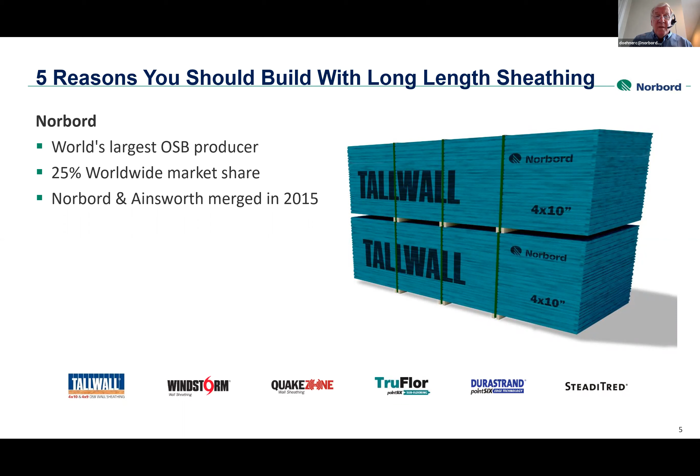And we became the largest producer in 2015 when we merged with a West Coast company called Ainsworth. TallWall that you see there in the slide is one of our brands that you'll probably have seen in your market, and it was actually the first long length wall sheathing product. Long length sheathing is a panel that covers both the floor and the wall framing with a single piece of sheathing. Long length panels make the home look clean and well constructed.

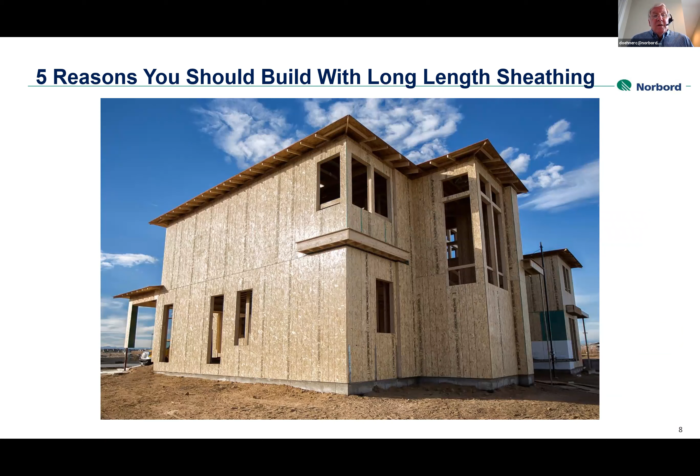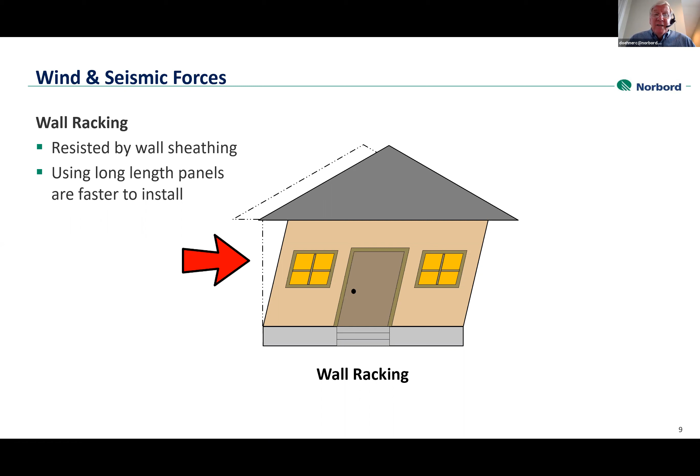The building codes require walls to resist racking. Wood structural panels are typically used for this purpose. And when we refer to wood structural panels, what we're referring to basically is OSB or plywood. They all fit in that category and serve the same purpose.

The first one is saving a half day of framing time per house. And basically how that comes about is from our customers. You'll see as we go through this, there are some labor and time saving things that you may currently be doing that will go away if you use the longer length sheathing. And of course that time saving adds up quite quickly when you multiply it by the number of houses that you do.

Sheathing walls with 4x8 panels typically requires installing lumber blocks between the studs, trimming panels, and nailing panel joints into the blocking. For as we all know, even an 8-foot ceiling height slab home is taller than 8 foot on the outside. So basically what we're saying there is, most people don't build 8-foot single stories anymore, but if you had an 8-foot single story, an 8-foot piece of sheathing really doesn't cover your entire wall because your wall is taller than that on the outside.

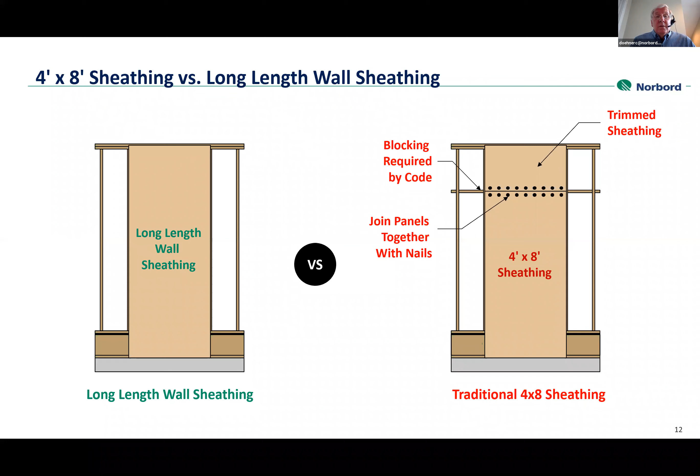When you have blocking, it requires a significant amount of additional framing lumber. Again, a framing crew spends about a half day just installing the needless blocking. This is costly and unnecessary work, especially because we don't have enough framers currently to go around. We certainly don't want them spending valuable time doing unnecessary work.

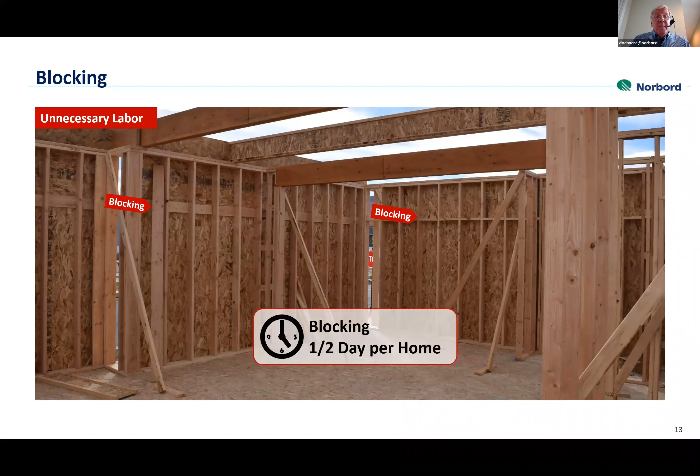Framers can install sheeting in different ways. You'll probably recognize one of the methods we're going to show you here. Some framers use 2 pieces of sheeting for each story, one full 8-foot length joined with a trim length. If you look at the photo, you can see the 8-foot on the top story and the 8-foot on the bottom story, and then a piece that had to be trimmed to do what we typically call a belly band around the house.

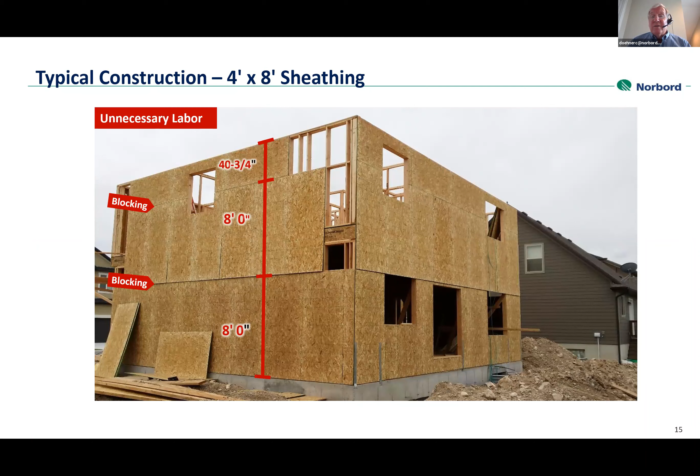With 4x8 sheeting, there's also a row of blocking that goes around the house at each story. So where you see that joint, it's not lining up into the floor band, it's lining up plus or minus of it. So there's blocking that has to be installed there. Other framers use 3 pieces of sheeting for the entire house. 2 pieces are a full 8-foot length and the third is a trim piece. However, this method still results in a row of blocking at each story that goes around the entire house.

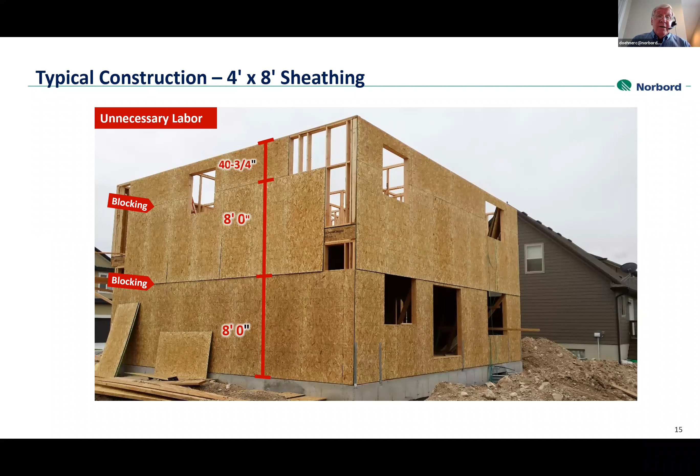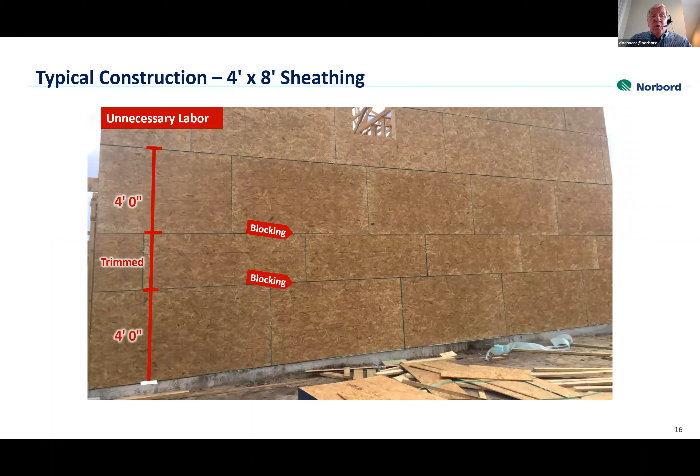In this example, you'll notice the sheeting is installed horizontally. Since the wall sheeting is greater than 8 foot, there needs to be 3 horizontal panels. Therefore, this method of sheeting requires 2 rows of blocking instead of 1 that you saw when the panels were oriented vertically.

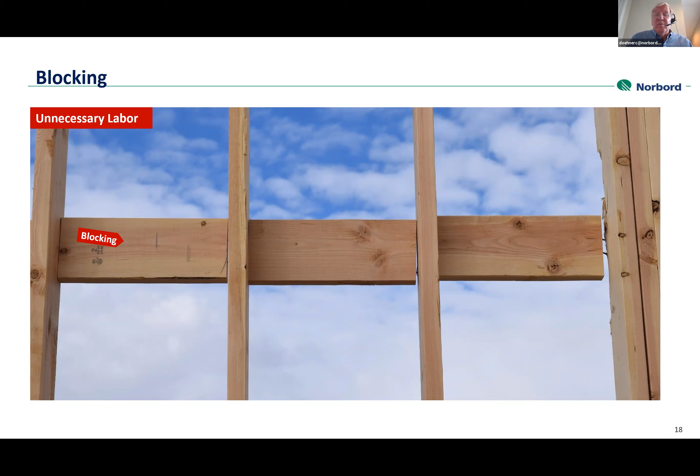These next slides can help you understand how much work blocking is for the framer. Each block has to be cut to 14.5 inches, nailed between the studs, and then the 4x8 sheeting is fastened into the 2x4 or 2x6 lumber blocks. In this photo, you can see the framer was able to construct his walls without having to install blocking because he had full-length sheets. So obviously that's going to speed him up.

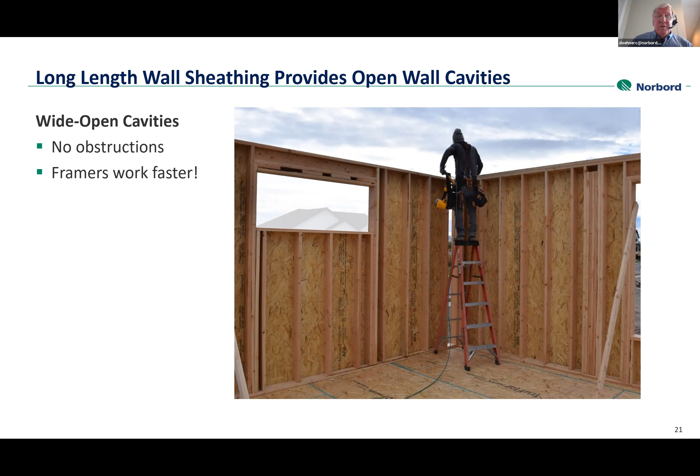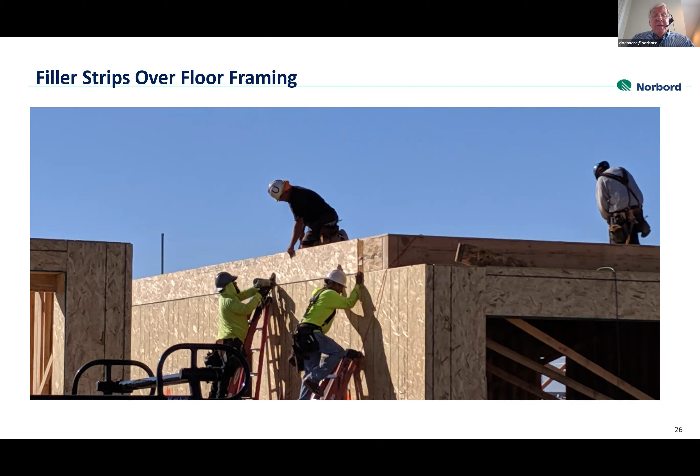Oops, sorry, clicked once too quickly there.

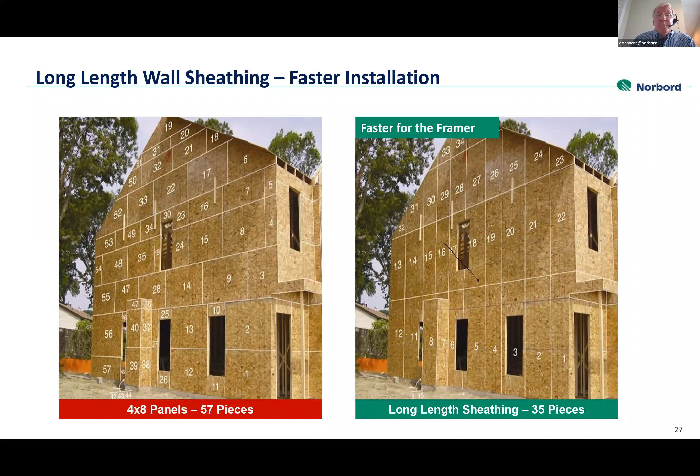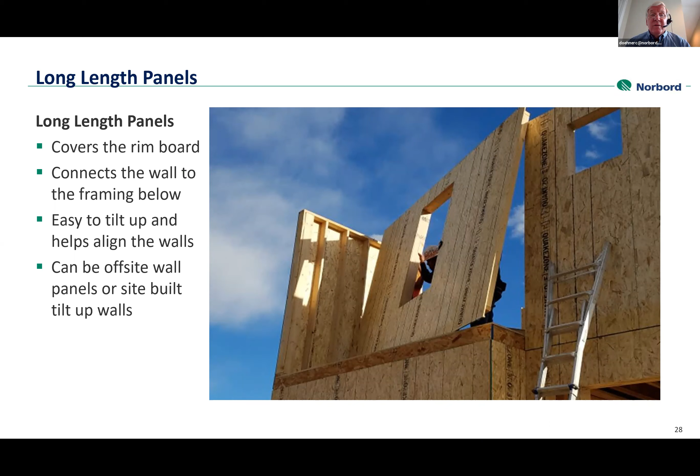This shows one way you can do that. One of the added benefits is it actually helps the framer straighten that wall, because now he's got that lip there that's going to hold it up against the floor system and allow his wall to be straighter without as much adjustment.

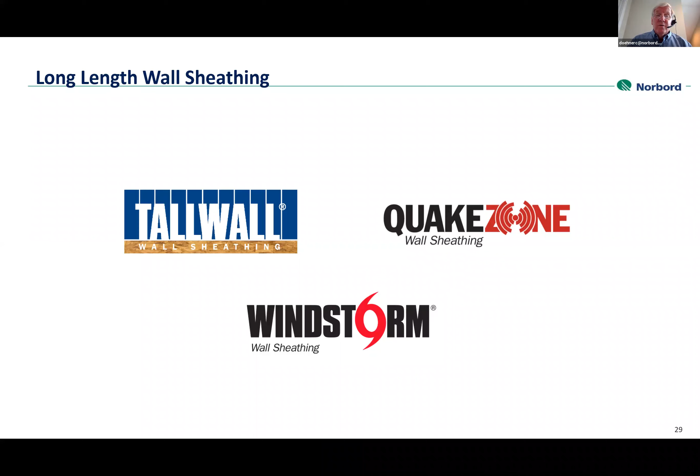NORBORD makes 3 different brands of longer length wall sheeting, 2 of which you would see in your region. Tall Wall, which most of you hopefully have seen, there's a fair amount of it used in your marketplace, and that's the original longer length panel. It's been out for over 10 years now. We also make Windstorm, which was originally designed for the high wind areas, and then Quake Zone. Quake Zone is a product that you won't see in the Maryland marketplace. It's a more Western product designed for the earthquake-prone areas of the West Coast. As I said, Tall Wall is the original length panel. It is available in 9 and 10 foot lengths.

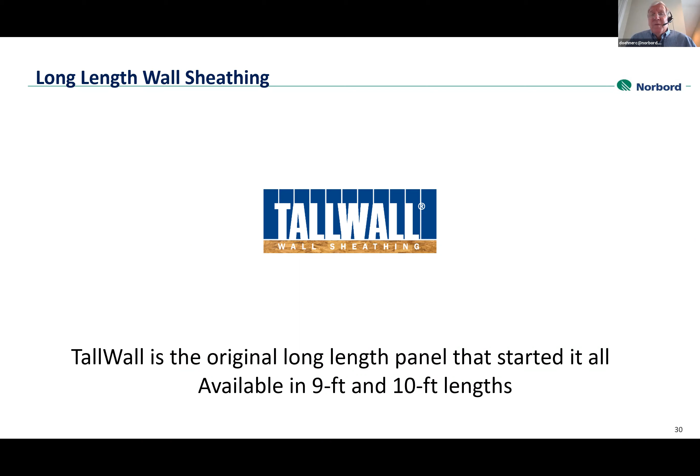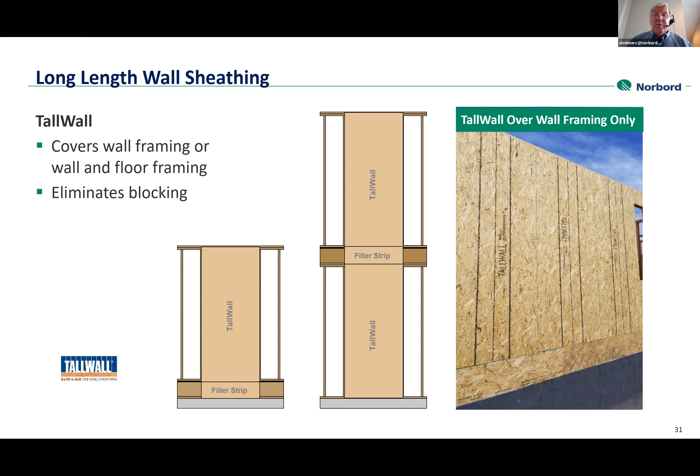And here's what we typically see in your market, the way it's used. Again, you can see the Tall Wall sheet is covering the wall section, but then there's a filler strip typically when there's a floor system, whether that be under the first floor or between the first and second floor.

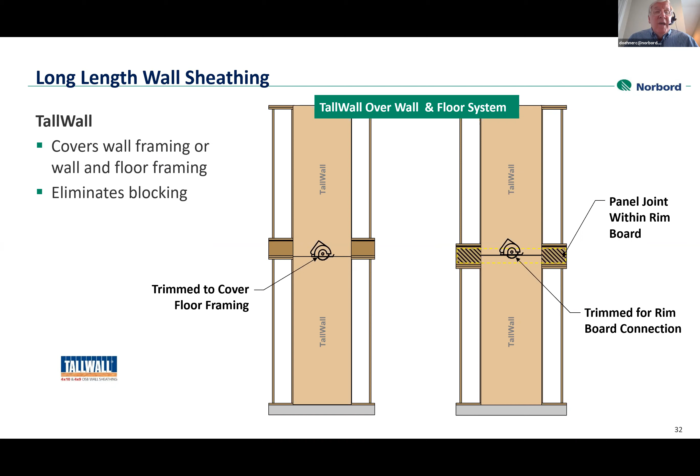Our TallWall brand is available in the 9 and 10 foot lengths, like I indicated. Depending on how you use it, sometimes you'll see the 10 foot sheets, especially where it will take you up into the floor system if you had a 9 foot wall on a slab like you're seeing here. And there are opportunities to use Tall Wall, both 9 and 10 foot, and do the house in 2 pieces if you have a 2-story home.

So I don't confuse you, and I already really mentioned that, QuakeZone, as I said, is available only on the West Coast.

Windstorm is the second generation of long length wall sheathing. It was initially designed for the high wind areas such as you have in Maryland in the coastal areas when you get to Ocean City and other areas on the eastern shore there. This second generation long length panel is available in longer and more specific lengths. It's available up to 145 and an eighth in length, so 12 foot, inch and an eighth in length.

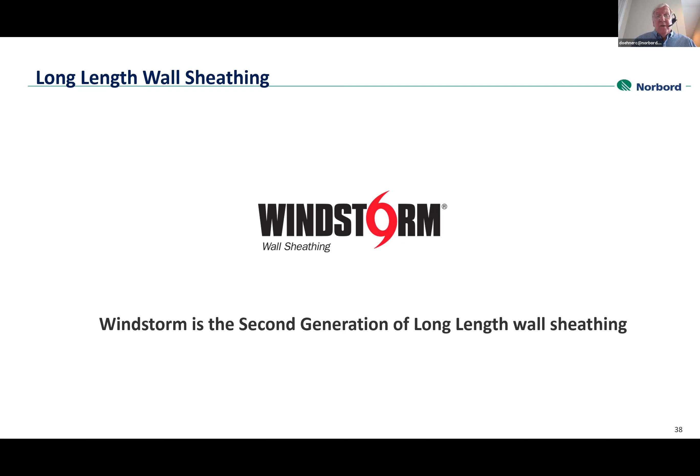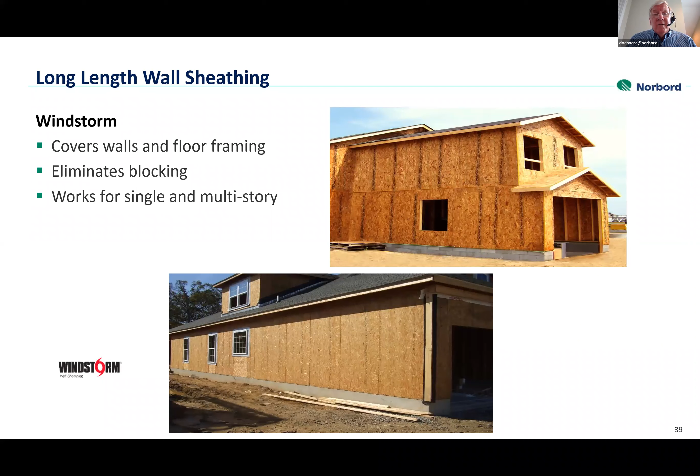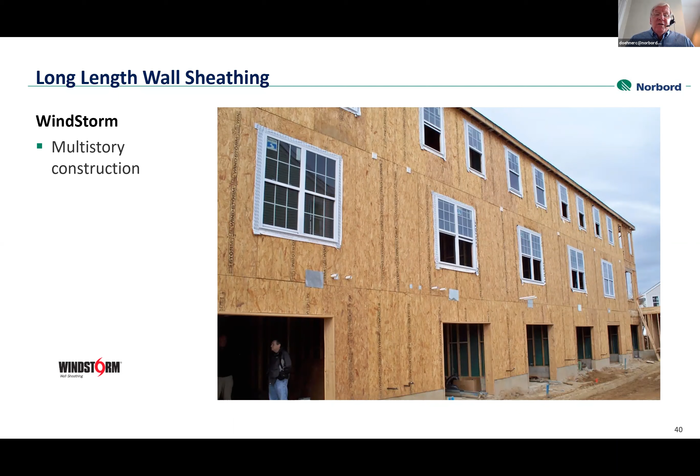Here's what the houses look like when they're covered in Windstorm. You see a single story there, 1 sheet per floor, and then in the multi-story you can see just 1 sheet per each floor, so 2 sheets cover the wall. In multi-story, again, you can see 1 sheet per floor goes up. So in multi-story, if any of you are doing multifamily construction, it greatly speeds it up, and productivity is an even bigger factor in multi-story construction.

Here's some of the lengths that are available. The first slide here is showing you the lengths that are for single-story construction. It's basically 8, 9, 10, 11, and 12 foot, with an extra 1 and an eighth on the length. The reason for that extra 1 and an eighth is what you're seeing in the little cutout circle there, in that by having that extra 1 and an eighth, now it'll take you all the way up on that top plate and give you a stronger connection. It gives you a continuous load path all the way up. That's a good thing everywhere, but it's especially important when you get in the wind areas. Now you've got a continuous connection.

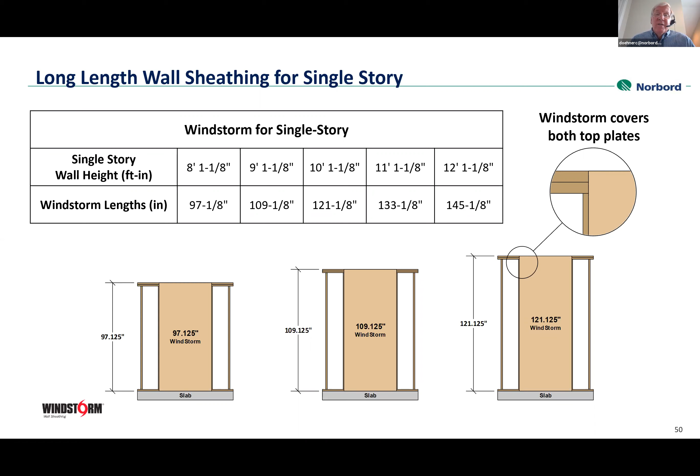For 2 stories, it's really a math situation. Look at your wall heights. Everyone builds a little bit different. You have different floor systems, that sort of thing. Sometimes you have a raised heel truss. This is just showing you some combinations that you can do for 2-story construction in taking the TallWall brand and the Windstorm brand and combining it and making it so that in these cases there's no trimming involved at all. Your framer just takes a sheet, pulls it off the unit, tilts it up, nails it off, and he's done.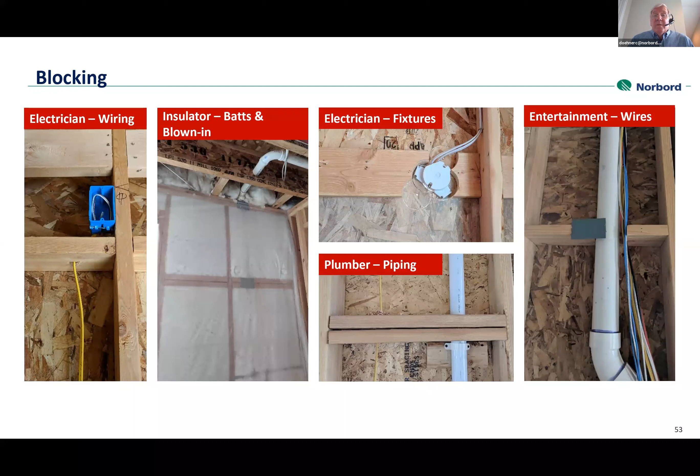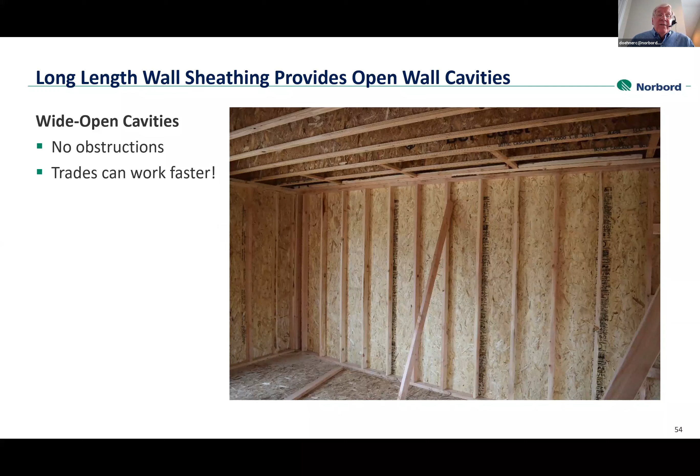Once again, you can notice with long length sheathing, you've got an open wall cavity. That's what your trades are working with if you have the right length sheathing. They don't have those obstructions to have to work around.

Let's talk a little bit about energy efficiency, reducing air leakage, and thermal bridging, which is the third reason. Here you can see what happens when you have to put the blocking in, which is required in most jurisdictions when you have a panel joint that's unsupported. Those blocks typically are never going to meet up exactly right, so you've got a gap in there that's going to provide air leakage. Sheathing joints are going to give you more opportunities for air leakage. The more you have, obviously, the more you're going to have to deal with that. Also, that blocking results in thermal bridging, which is energy loss through those framing members.

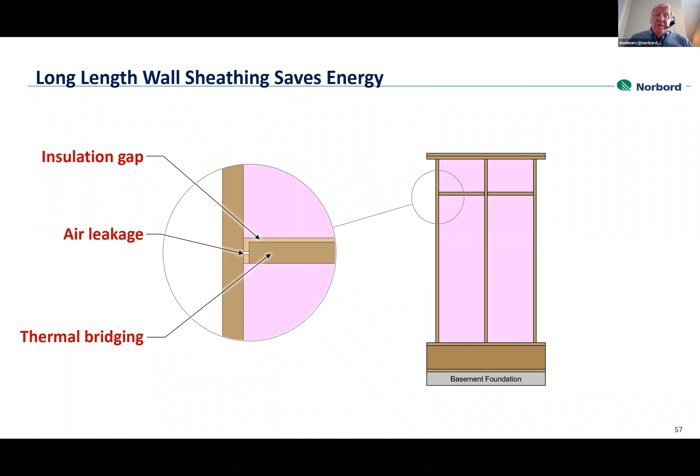Here's really another shot of just the fiberglass in there, and you can see the gap in the circled pull-out there where that insulation is not going all the way up. So you have a small gap there where the insulation is not going to do its job. If you multiply that by all of the insulation bays around the house, it ends up to be a much bigger hole than you might expect.

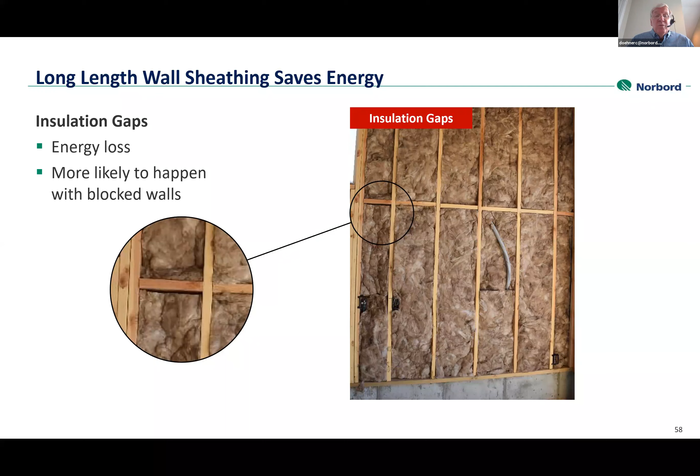So sometimes framers, when they're using shorter sheets like this, will try to push that panel down tight. That's going to help them with air leakage, but what it's going to do is potentially cause buckling of the panels when those wood products move. So there should be a gap there.

Once you put the block there, that's going to cover up some of it, but you still have a considerable amount of air leakage that's coming around that block. Blocking by itself does not solve the air leakage problem. House wrap helps with it, but if you had the long length panels and house wrap, then you're going to have even less air leakage.

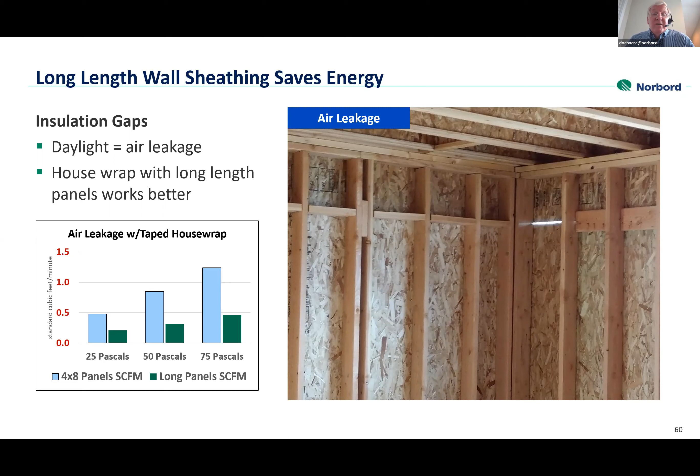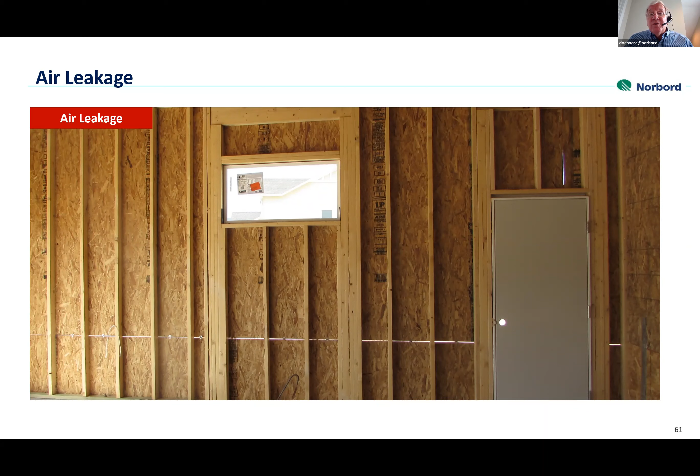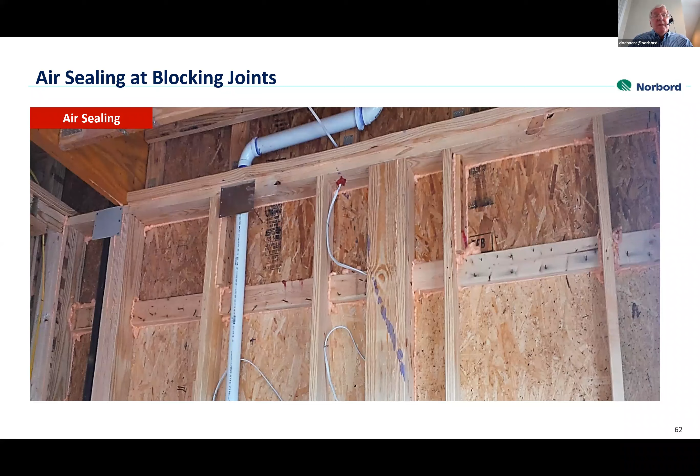Some builders choose to tape the inside of the seams, and that can be done, but once again, the more joints you have, the more tape you have to use, the more time your installer has to do.

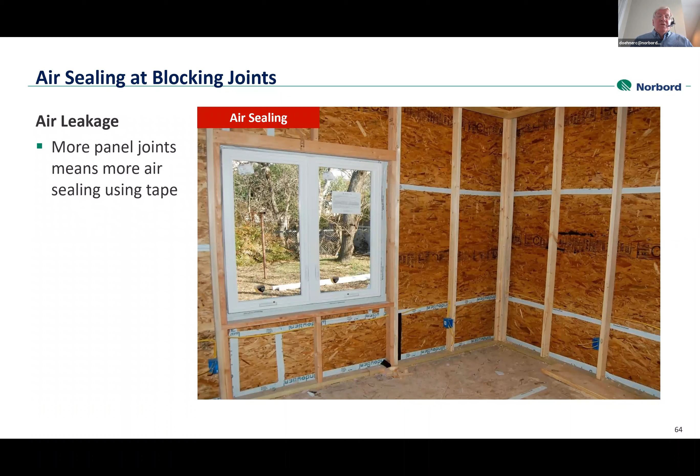In this example, you're seeing a smart builder who is using some advanced framing techniques. And you can see that he's shortened the length of some of his cripple studs under the windows to reduce thermal bridging, but yet he still blocked that wall. So it would have been much simpler for him, and he would have actually got more benefit to use longer length panels and get rid of the blocking. And if he does that in combination with what he's done under the windows, that's even better from an energy perspective.

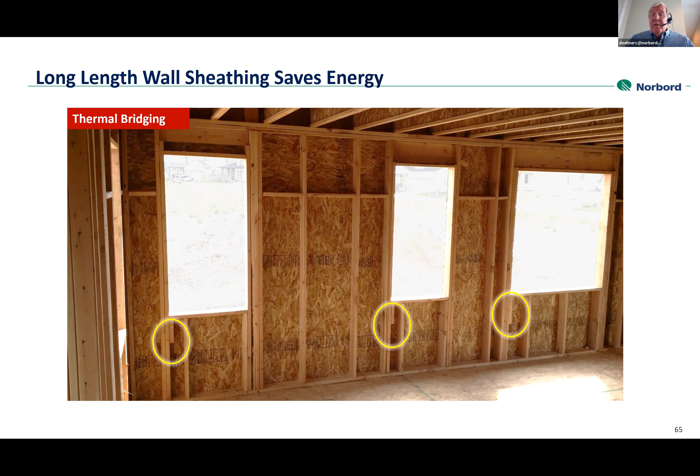Long length panels improve energy efficiency by reducing the air leakage, thermal bridging, and insulation gaps. Builders and energy raters have reported that long length panels improve your blower door tests, that it's a noticeable improvement in your blower door test simply by going to the longer length panels.

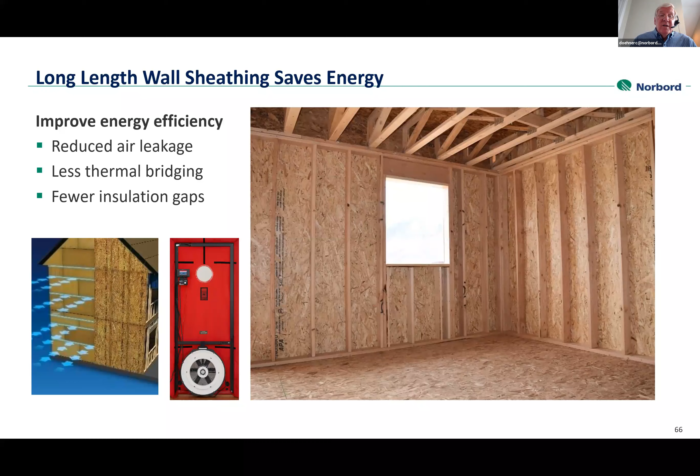The fourth reason to consider long length wall sheathing is reduced sheathing and lumber waste. We would all certainly prefer not to have our homeowners see this lumber and sheathing waste. Not only does it look bad, but they may ask why they had to pay for all of this. Of course, some sheathing is unused because of door and window cutouts, and you'll always have some waste.

So this is not going to get rid of all the waste, but it's going to get rid of a considerable amount of it. Because the long length panels are pre-trimmed at the mill, there's less sheathing waste on the job sites because they don't need to be trimmed to length. The question we often ask builders is, you use pre-cut studs, why do you not use pre-cut sheathing?

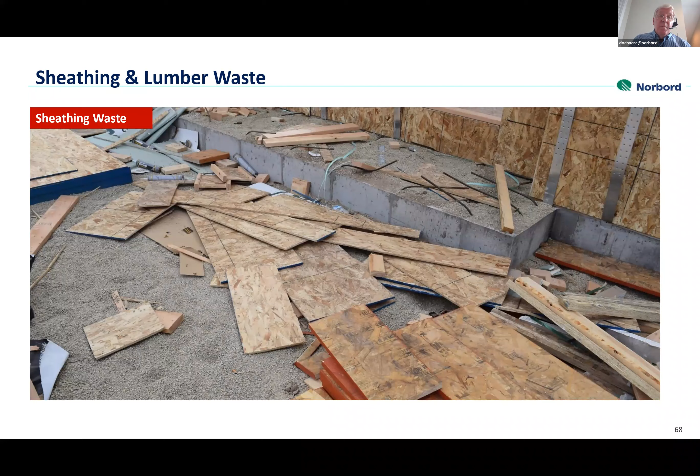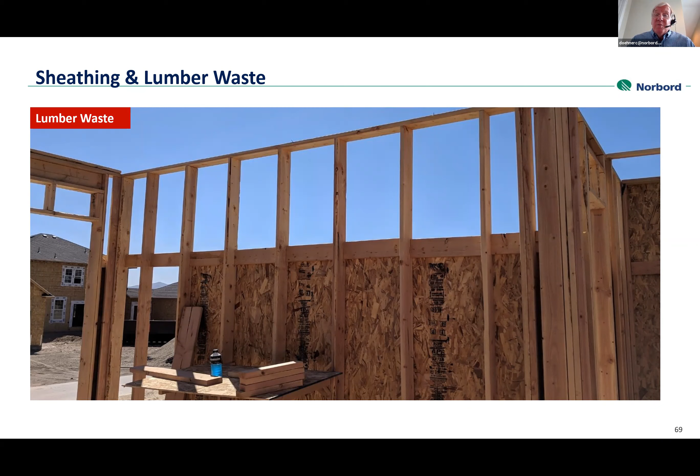And here you can see where the extra lumber was bought for the blocking that's in this wall. And why would you want to buy extra lumber to block when you don't have to? And a fair amount of that ends up in the dumpster and then the landfill. Certainly material waste going to the landfill is something we all would like to avoid from an environmental perspective. Eliminating and reducing disposal costs saves you money.

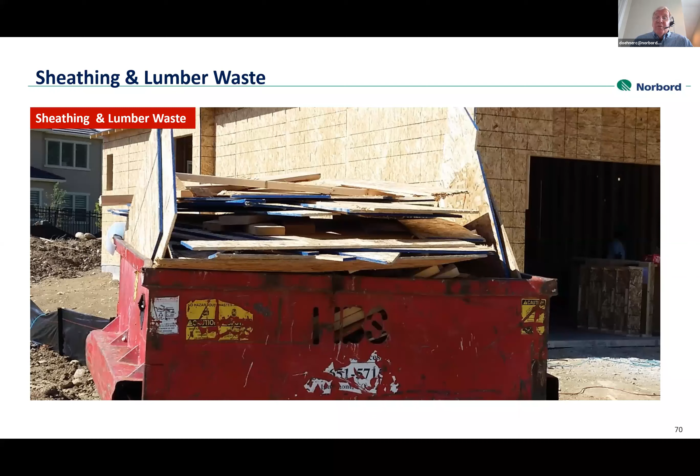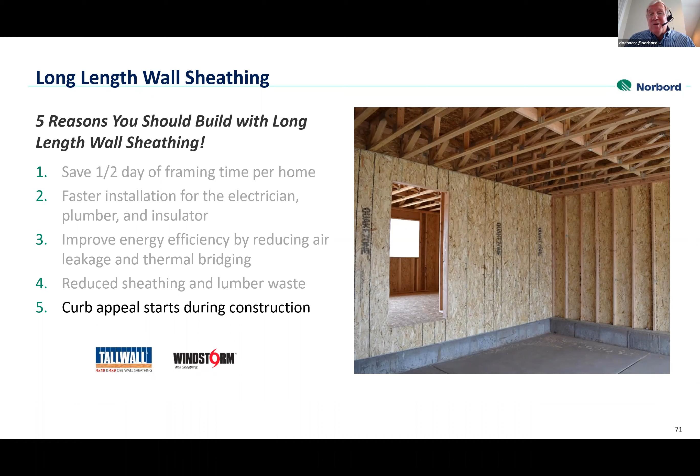And the fifth reason is curb appeal. And most people don't think about OSB as curb appeal, but on the weekends, we still have people driving around through developments, probably especially more so now with the pandemic when they've got less other things to do.

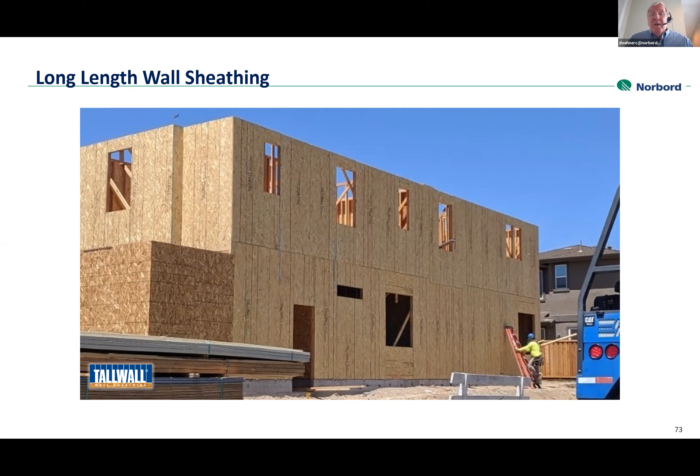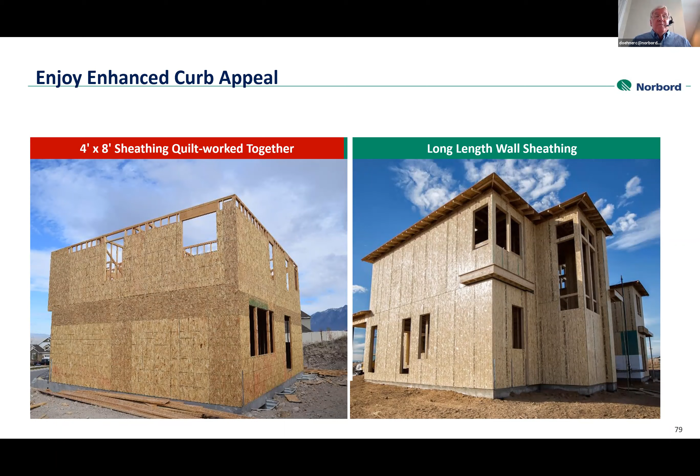So there you have it, folks, the top 5 reasons why you should build with long length sheathing. Long length TallWall and Windstorm is readily available from dealers in your market. If they don't currently stock the length you need, they can easily bring it in with their normal orders. Whatever they stock, they can just add a unit of whatever lengths, whatever product you need. Just let them know what those lengths are, and typically most of the building supplies will bring that in for you.

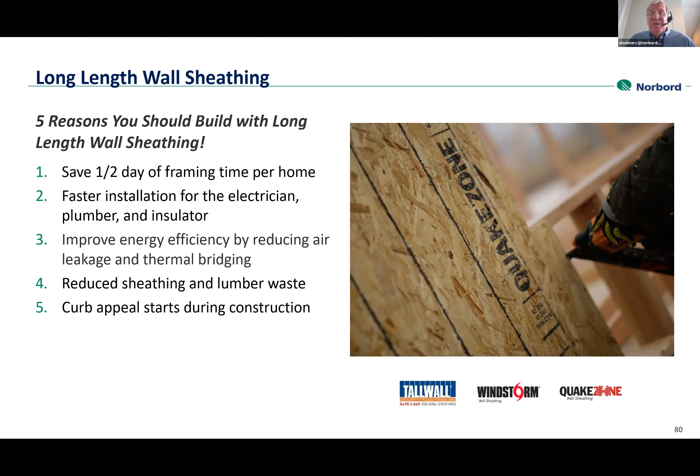One thing that we didn't touch on that I like to let people know, because the obvious question is you see all these wonderful things and then you think, well, gee, how much does this cost? And what you're going to find with the longer length wall sheathing, just like TallWall and that 9 and 10 foot that you may be using today, it's a couple pennies more per square foot of board than the 8 foot board is. However, your cost per house should not go up. And the way that magic happens is that you use less OSB, you buy less OSB to cover the house when you're using the right length.

So that small increase in per square foot price and the decrease in the amount of product that you need to buy will typically offset each other. So your OSB price typically stays the same for your house. What you pick up as a builder, of course, is the speed of all your trades, but you also pick up the savings from not having to buy all that blocking.